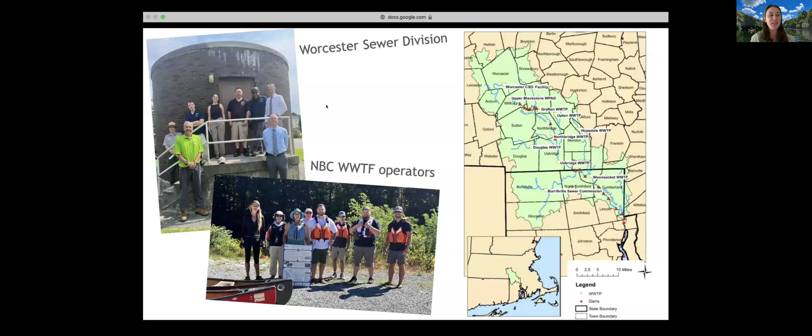I should note that the city of Worcester was invited to participate and speak today, but they declined to participate, but we wanted to make sure that we shared this information about combined sewer overflow. Just making a note that if Worcester is in the audience, we welcome your comments, we welcome your clarifications or added information.

So just a quick overview of our run of order of things today. First, we will have Alicia Taha speaking about combined sewer overflow kind of 101. What is this topic? Giving us a good background. And then Kaylee McLaren, our restoration manager, will talk about the city of Worcester. Catherine Kelly from the Narragansett Bay Commission will speak about Pawtucket and Central Falls. And then Catherine Lang from Mass Rivers will talk about resources. We will leave time at the end for Q&A. So like Leah said, please put your questions into that Q&A box and we'll get to them.

So with that, I will introduce Alicia Taha. She's the documentary author of New England's Unseen Environmental Threat, Combined Sewer Overflows. So I'll stop sharing and go ahead, Alicia. Awesome. Thank you so much, Stephanie. Let me start my share.

All right. So hi, everyone. My name is Alicia Taha, and I am a recent graduate from the University of Massachusetts Amherst. For the last year, I've worked with Professor Spector in the Political Science Department on a faculty-student collaborative research project on combined sewer overflows. Throughout our project, we were able to interview some incredible people in the space. Stephanie Covino and Catherine Lang were just two of those amazing people.

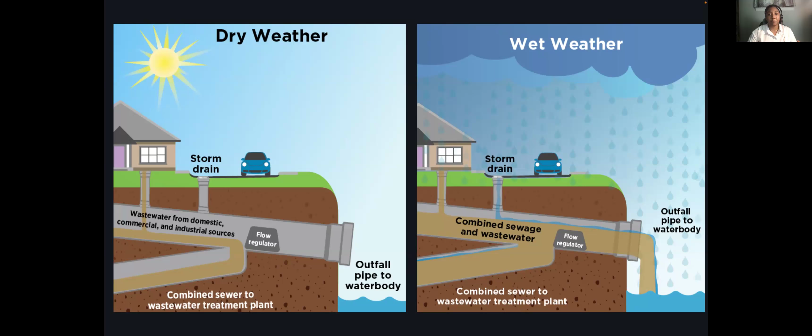When I talk about this, what I usually find a lot of people have a really hard time wrapping their head around is that this mechanism was actually built into the system when it was made, but what they couldn't have foreseen at the time was the precipitation patterns that affect us today.

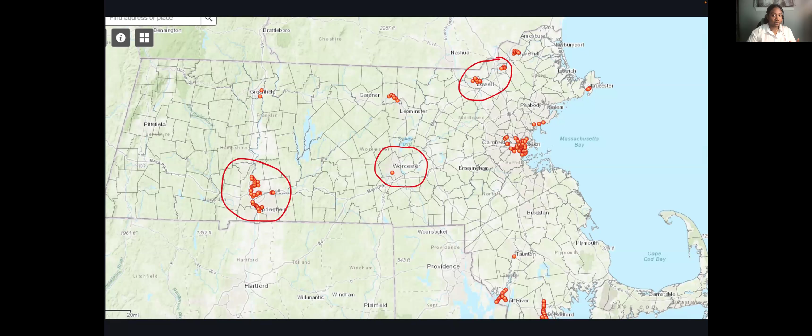So, how will climate change worsen CSOs? Well, when we started our research, it was during the summer of 2023 when we were seeing record-breaking numbers of CSO activity, which of course was directly correlated to the record-breaking number of rain events that summer as well.

So what we can expect to see, and I actually quote from Catherine here: we are seeing more precipitation. It's coming in heavier, flashier events, which completely overwhelm our wastewater facilities. These facilities were not built for the precipitation we are getting today, and they're certainly not built for the trends that we are expecting to see in the future.

And here are some metrics from the summer of 2023. This first bit we learned from John Macone at Merrimack River Watershed Council. So in the 61-day period of June and July, on 28 of those days, CSOs occurred in the Merrimack River. And on 39 of those days, the Merrimack was under a 48-hour no primary contact advisory. And this was happening during arguably our most prominent time for recreation in the area.

That summer, I was also able to attend a CSO facility tour, thanks to Stephanie. And what we learned there was, on average, at that facility, there would be 12 CSO discharges in a whole entire year. But in July alone, there had already been 7 CSO discharges. So what we can see here is that if we're predicting that one of climate change's major effects will be the increased frequency and scale of precipitation events, we will also see those numbers increase for CSOs as well.

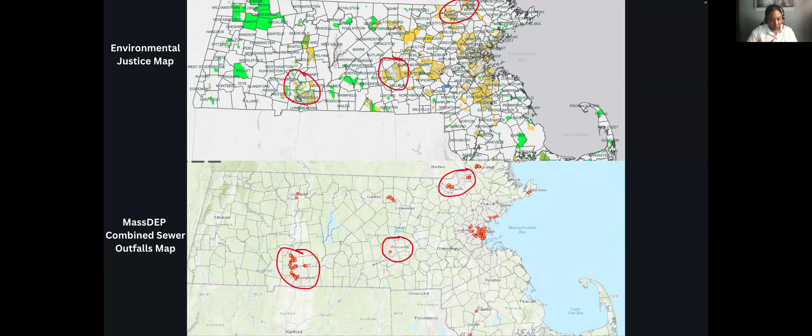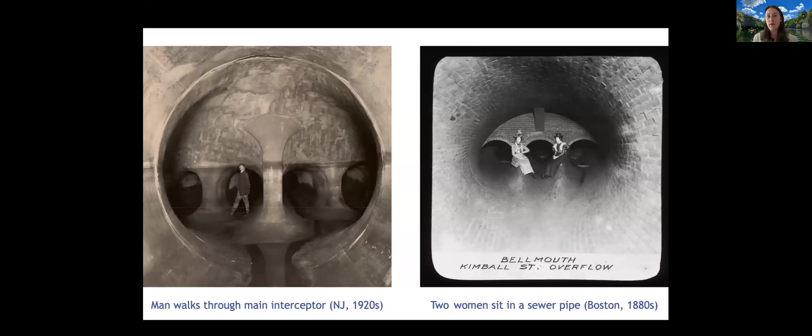There are different ways to address CSO, and I won't go into this in detail, but just to kind of break it out into 3 different categories. One is separation of your pipes. One is adding decentralized green infrastructure or sometimes gray infrastructure in a lot of different places to kind of take that stormwater out of the system to allow more room for that one pipe for that stormwater and sewer to go. And then the last is creating a very large, more centralized holding area to take a lot of that stormwater out, wait until the storm passes, and then be able to send it into the wastewater treatment facilities.

So in Boston, for instance, they estimated that it's about $340,000 per acre to treat this, to separate their system. In 2021 alone, they spent $30 million, and they have plans to separate East Boston and South Boston, about 20,000 acres or so, and that's only 3% of their sewer system between 2024 and 2029, and this is costing millions.

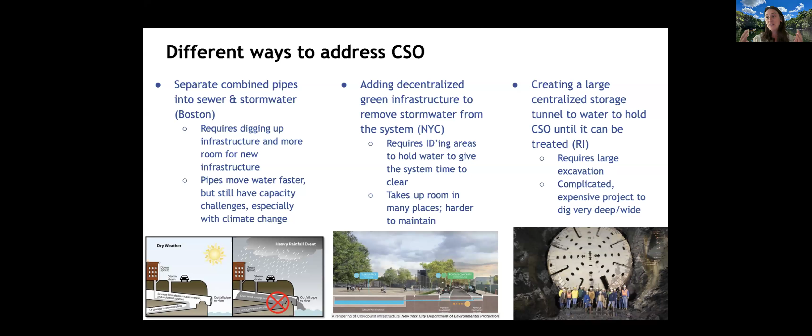And then in New York City, they have spent also millions of dollars on all of these different decentralized projects, including things like tree box filters, porous concrete, adding storage underneath things like basketball courts and sidewalks. So there's a lot of different ways to solve this particular problem. And next, I'll let Kaylee talk about what's going on in Worcester. So Kaylee McLaren is the restoration manager at the Blackstone Watershed Collaborative. Kaylee.

Great, thanks so much, Steph. Yeah, so I'm Kaylee. I'm going to be talking about CSO specifically in Worcester. So the facility that treats the City of Worcester's wastewater is called Upper Blackstone Clean Water, and it's one of New England's largest wastewater treatment plants or clean water facilities. It's also referred to that way because their product is clean water, which I love.

So it serves roughly 250,000 people in the greater Worcester area, and it discharges directly to the Blackstone River in Millbury, Massachusetts. So the water that leaves the facility is actually much cleaner than the river itself. So in this picture, we can kind of see that, right? Where the treated water on the left meets the Blackstone River on the right, and the treated water is a lot clearer than the river itself.

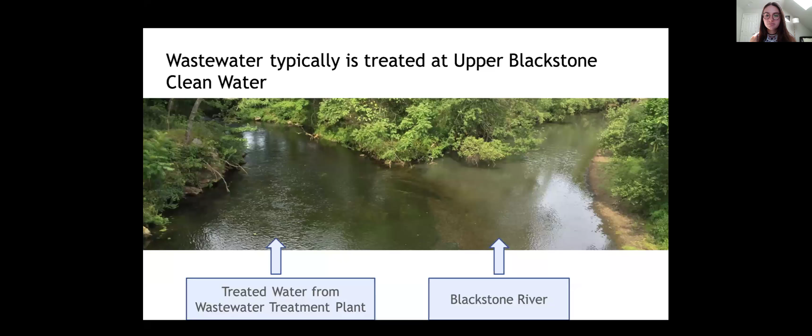The city of Worcester constructed a unique CSO treatment facility in 1984, and this facility usually acts as a regular pump station to Upper Blackstone Clean Water. So as a reminder, the waste flows via gravity to the lowest points in the city, and then it's pumped upward to get to the next leg of its journey via gravity. And then eventually it reaches a wastewater treatment facility.

However, during extreme rain events, when we have the infrastructure that can't handle the water volume coming in, the CSO treatment facility can hold water until there's more capacity, or it can partially treat the water and release it into the Blackstone River. And then in very extreme rain events, the CSO treatment facility might have to bypass and discharge untreated CSO water directly to the Blackstone, but that's pretty rare.

And the total length of the CSO pipe is only about 7% the total length of the sewer pipe in the city. And here we also have a map of where the CSO treatment facility is and where the CSO outfall is in relation to the rest of the city.

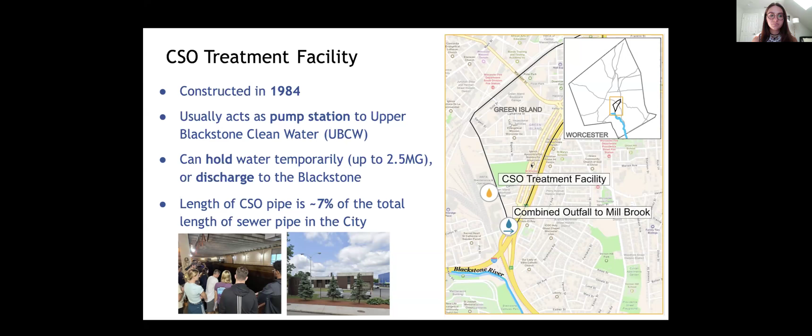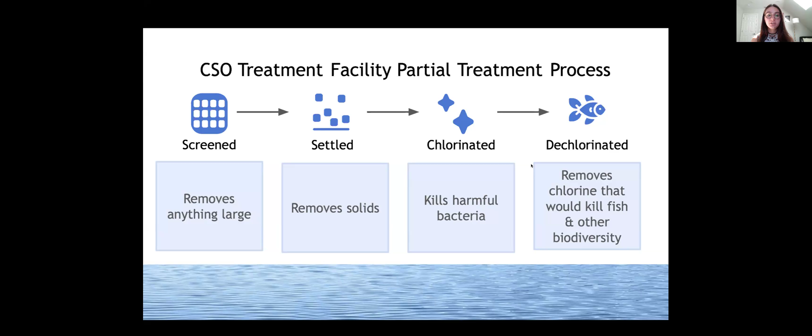The CSO treatment facility has a partial treatment process where the water coming in gets screened, settled, chlorinated, and then dechlorinated. So the goal is for solids to settle and be removed, and then bacteria are removed via chlorination, and then the dechlorination process makes the water safe to enter the river without killing fish or other biodiversity.

So there are 4 scenarios that can happen at the CSO treatment facility. The first is the dry weather scenario. So during dry weather, the CSO treatment facility acts as a regular pump station, and sewage gets pumped to Upper Blackstone Clean Water. So no water is being held or treated at the CSO treatment facility in this scenario.

The second scenario is a minor storm, and the facility operators are confident that the rain will end quickly and have little accumulation. So since we're in New England, that's definitely a tough one to be confident in. But the water coming in gets partially treated through that process of screening, settling, chlorination, and dechlorination, and then the water is held in storage tanks within the CSO facility and then pumped to Upper Blackstone when they have the capacity to receive the water. So this scenario is not very common.

And then the third scenario is a CSO event where the water is partially treated by the CSO treatment facility by that same process of screening, settling, chlorinating, and dechlorinating the water, and then it's discharged to the Blackstone River. So when this happens, the City of Worcester sends out an alert via an email list and their website to let the public know that there was a CSO event and you should avoid contact with the water for 48 hours in the communities of Worcester, Millbury, Grafton, and Sutton.

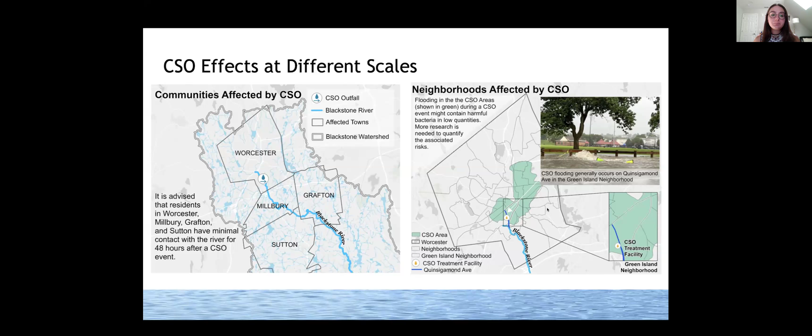And ideally, the pipes in these areas would be replaced with new separated pipes, but this is very expensive to do. So in 2019, Worcester published the Integrated Water Resources Management Plan, outlining how they can meet the city's sewer, stormwater, and drinking water infrastructure needs within the next 50 years. So the goal of addressing these things together is to make sure that the city and the taxpayers can really just get the best bang for their buck on the many different infrastructure projects that are needed.

And since 70% of the city is considered part of an environmental justice population, the goal is to limit ratepayer costs. And the city estimates that state and federal mandates for water resources capital spending over the next 50 years will reach $2.6 billion.

So some of the examples of projects identified in the integrated plan include the Green Island Flooding Relief Conduit for $40 million in 2031. So this is the highest scoring capital improvement project within the integrated plan. However, it is just a conceptual plan at this stage. So the plan notes that the final engineering design will consider green infrastructure opportunities and be implemented where it's feasible and cost effective, but it doesn't give much more information beyond that.

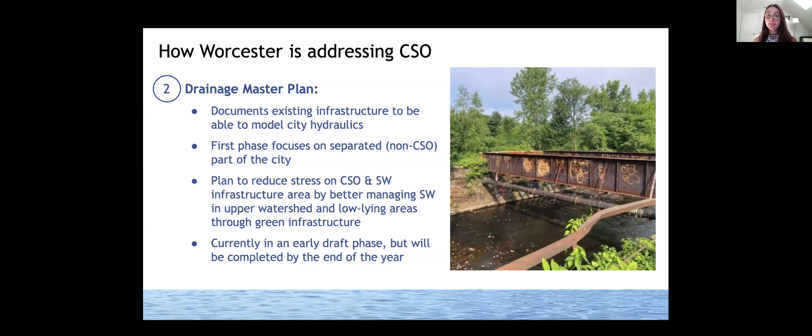So the first phase focuses on the separated part of the city. However, reducing stress on the stormwater system and the higher points of the city might also help reduce CSO by freeing up the system for more CSO in other lower lying areas. The city is also working to update their CSO long-term control plan. So stay tuned to learn more about that. The last plan was from 2004, so it'll be really interesting for us to hear what this plan will include, like which projects have been completed and which ones have been added to the priority list to ensure these continued improvements keep happening.

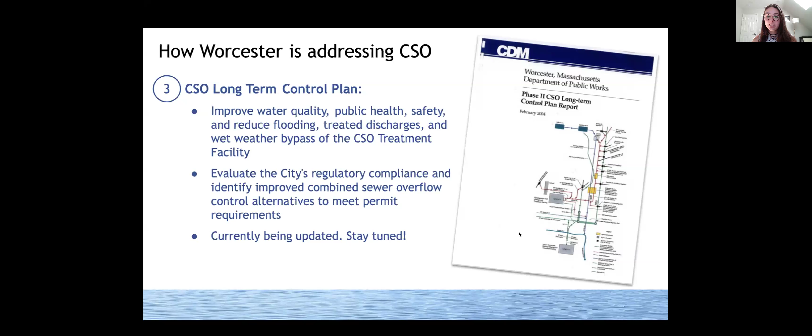And the city recognizes that wet weather impairment should be addressed, and the integrated plan notes that they believe that investments in stormwater controls will yield greater benefits than further investments in combined sewer overflow controls. But we believe that much more investment needs to be made on addressing CSOs, and that there are many steps in identifying the ways to replace pipes and create storage and add green infrastructure to reduce stormwater flows. And we also hope to continue partnering with the city to help improve the public understanding of this issue, which is critical to address it.

So we've been working with the Worcester DPW to hold tours of the CSO treatment facility in both 2022 and 2023 to help educate both our partners and the public. So if you're interested in learning more about CSO, especially if you're a Worcester resident, I would encourage you to reach out to your city councilor, to DPW, or to the Sustainability and Resilience Department, because there's a lot of work that needs to be done, and it can be tough to gain support to prioritize something as generally unexciting as sewer overflows without a push from the public to do so.

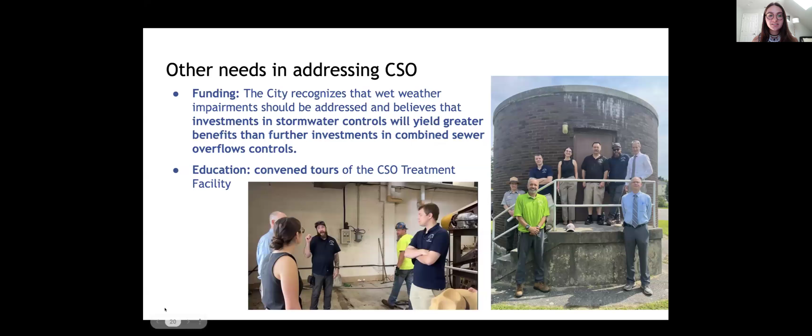Thank you so much. And again, I wanted to say a thank you to the Upper Blackstone Wastewater Treatment Facility; I know the director's also in the audience. So that's a part that we didn't include, but if people have questions for her, I maybe voluntold her that she can help out with some of those questions as well.

I also wanted to mention, and apologies for not doing this before, that I wanted to give one more acknowledgement to both the Hassanamisco Nipmuc Band and the Narragansett Indian Tribe. When the Blackstone Watershed Collaborative was created 3 years ago, addressing CSO was not one of our top priorities. It hadn't come out, but those two Indigenous partners really pushed to say that this is important and we want you to prioritize it. And so I give them full credit for having it be a really important issue that the collaborative is working on.

So thank you. Next, I'll introduce Catherine Kelly. She's the Assistant Director of Engineering and Construction at the Narragansett Bay Commission. So I'll stop sharing and I'll hand it over to you.

Okay, can you see my slides? We cannot. Okay. You see it now? No. There we go. You got it? Perfect. Okay. Thank you. Sorry.

So NBC's CSO program was broken up into 3 phases. Phase 1 of the program included construction of a deep rock CSO storage tunnel underneath the city of Providence. That was about 3 miles long, 26 feet in diameter. We also included diversion structures and drop shafts at 8 CSOs, as well as relief structures and a tunnel pump station to pump the flow to Fields Point.

Phase 2 of the program included construction of 2 near-surface interceptors along the Woonasquatucket and Seekonk rivers. This would pick up CSO flow from outfalls along these rivers and convey the flow to the tunnel. And we're currently in phase 3 of the program. Phase 3 will include construction of a CSO storage tunnel, as well as a tunnel pump station and drop shafts and various near-surface facilities to convey flow to the tunnel itself.

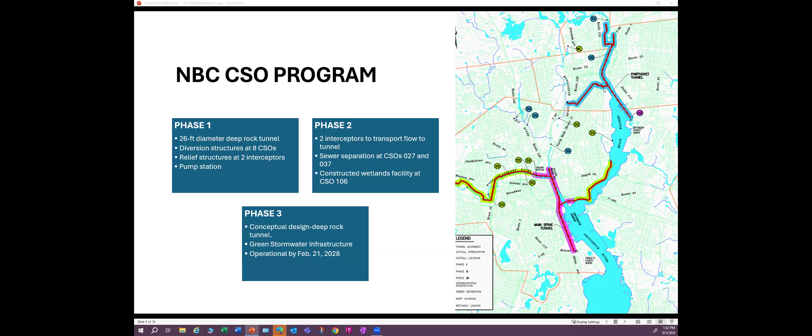And the whole point is to capture this flow that originally discharged to the receiving water, redirect it to a tunnel, store it in the tunnel until the wet weather event is over and there's capacity at the treatment plant, where the flow can receive treatment before being discharged to the plant's receiving water.

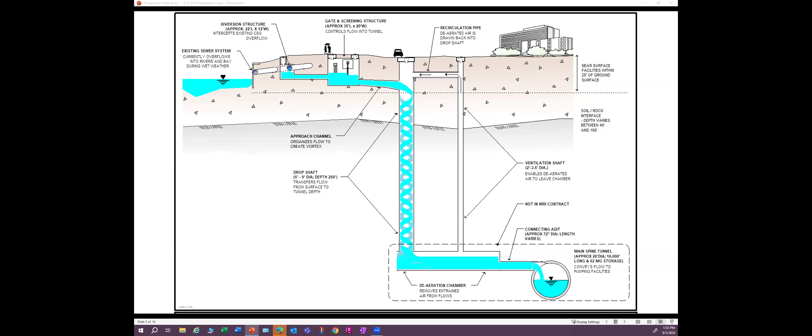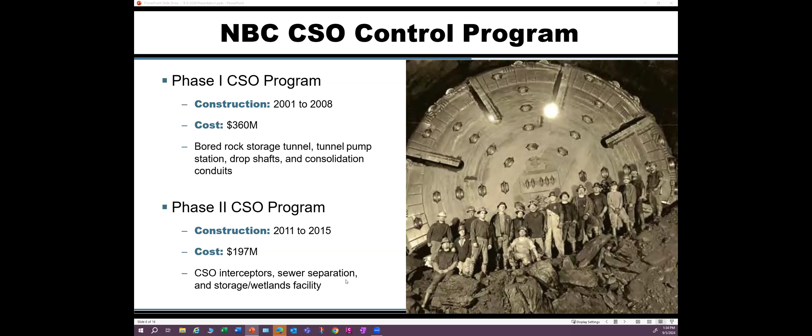So phase 1 of the program occurred during the years of 2001 to 2008, and the tunnel pump station went online in November of 2008. And that was completed at a cost of $360 million. Phase 2 of the program was completed in 2015 at a cost of $197 million. And again, that included those near-surface interceptors that picked up flow from CSO outfalls and conveyed it to the Providence Tunnel. We also did several sewer separation projects during phase 2 of the program.

So we're currently in phase 3 of the program, and phase 3 has been broken up into 4 subphases, 3A through 3D, and this will occur over a 20-year period. The construction of phase 3A facilities is expected to end in 2027, so we're right in the middle of this effort. And construction cost for phase 3A is estimated to be $900 million. The total cost for all of phase 3 is $1.4 billion. So we're addressing most of the flow during phase 3A.

And I think two of our largest CSOs are being addressed right now. As part of phase 3A, we will be constructing a CSO storage tunnel. This tunnel will be about 2.2 miles long, 30 feet in diameter. We're constructing a tunnel pump station, as well as various drop shafts and consolidation conduits and other near surface facilities that will convey CSO flow to this Pawtucket tunnel.

One thing we're doing in phase 3 that we didn't do in earlier phases of the program is the installation of green stormwater infrastructure, or GSI. NBC has committed to spending $40 million on GSI during the 4 subphases, so $10 million during each subphase.

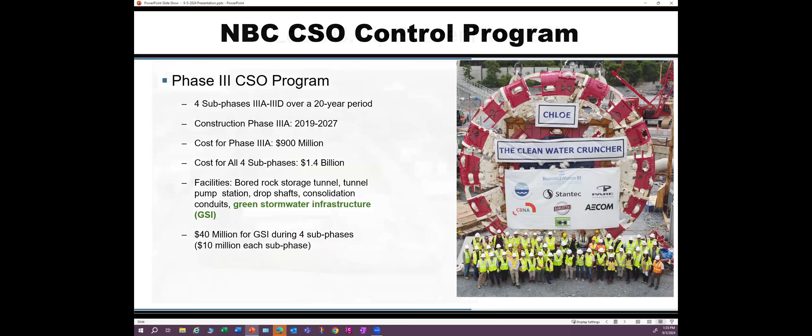So now I'm going to talk about some of our GSI projects that we've done. These are projects that folks at NBC are really proud of, and it's really been a benefit to the community in which we've done this work. So early on in the program, NBC partnered with the city of Central Falls to remediate existing athletic facilities or properties that were found to be contaminated, and rehabilitate these fields and also install green stormwater infrastructure.

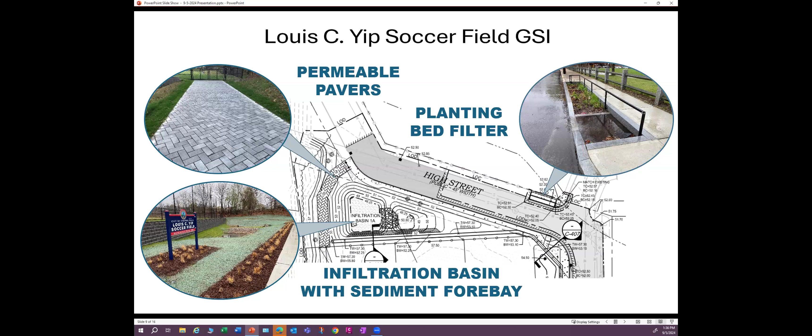The first project I'll talk about is the Louis C. Yip soccer field. About maybe 7 or 8 years ago, this was a property that had been abandoned. It was an abandoned industrial property, not in use. The city acquired the property via eminent domain and worked with NBC to do a design for green stormwater infrastructure on the property. GSI on the property included 2 infiltration basins on the north and south ends of the property. We also installed permeable pavers and planting bed filters along the roadway adjacent to the soccer field.

This is another great project that NBC participated in, the Macomber Stadium GSI project. Again, another field that was not in use due to contamination found in the soil. Furthermore, the field had essentially reached the end of its useful life. I don't think it was used by any youth athletic groups. It may have been used by some adult athletic groups, but it wasn't a good field.

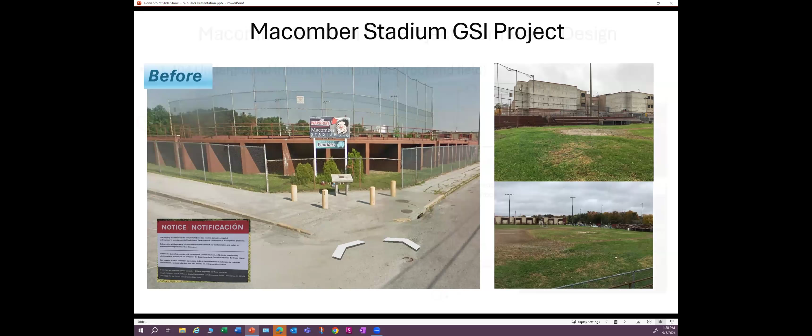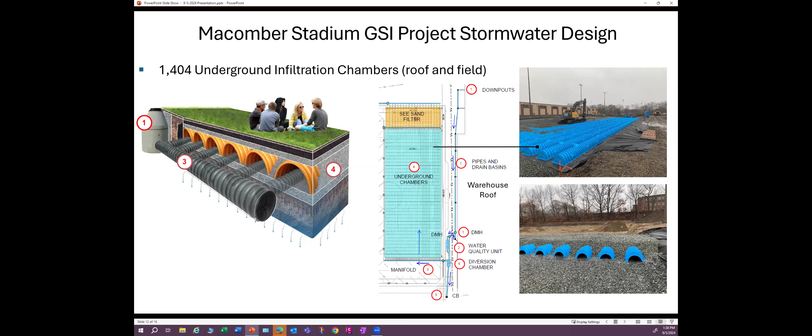It needed some work. So NBC installed infiltration chambers underground, along with a sand filter, and these infiltration chambers were sized to hold, I think it was around 140,000 cubic feet of stormwater runoff, which is about the volume of stormwater runoff generated during a 25-year storm. We connected roof leaders from an industrial facility located north of the property to these underground chambers, and we also redirected stormwater runoff from the roadway to these chambers. Following completion of installation of the chambers, we constructed the artificial turf field over the chambers.

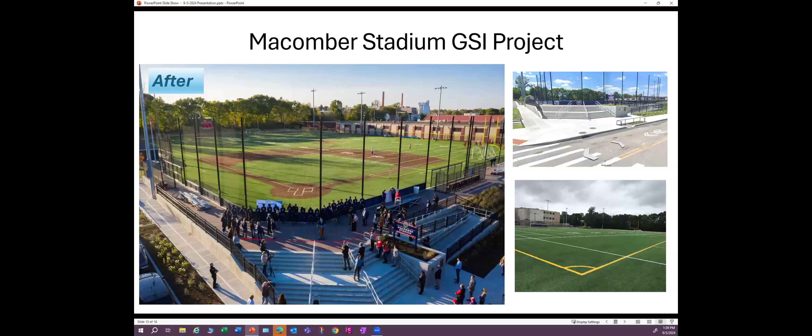And then the third GSI project that I'm going to talk about is the Pierce Park GSI project. This included construction of a basketball court with pervious pavement. Underneath this basketball court, there was an infiltration system similar to what was installed at Macomber Field, the underground infiltration chambers. Same concept here. We redirected stormwater runoff from the road to these chambers, so it infiltrated to the groundwater table instead of being directed to the combined system where it could contribute to CSO overflows to the Blackstone River.

So we had to tear up the field to create this overflow pipe. When we restored the field, we put in an environmental cap over the contamination and rehabilitated the field, and that's now in use as a baseball field.

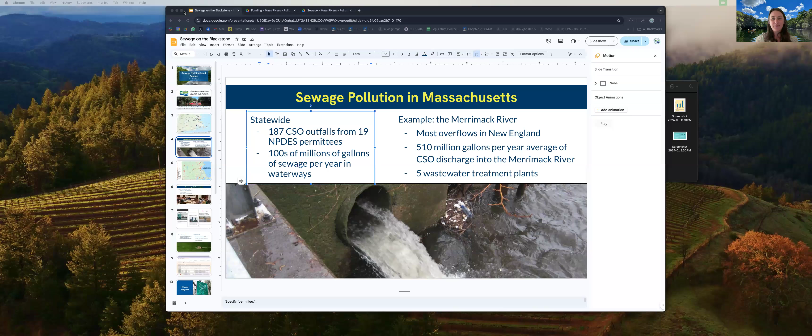All right, we are almost live. Oh, you're getting a preview of my slides to come.

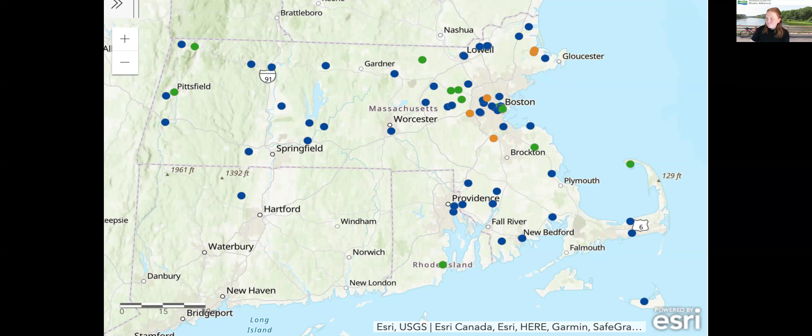Sewage pollution is a really big deal for us because it is in fact a statewide issue. We have 187 outfalls across the state. Alicia showed that map earlier of all of the little dots. It is an intensely widespread problem. 19 different communities experience sewage pollution from combined sewer overflows, resulting in hundreds of millions, sometimes billions of gallons of sewage pollution per year in our waterways. And as mentioned, with climate change, that's only increasing.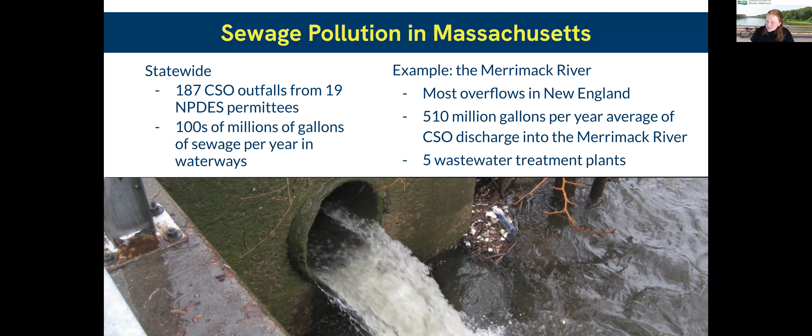The Blackstone certainly is one place that gets it, the Merrimack, the Chicopee, the Connecticut. As you can see, I put the numbers of outfalls per city on the left. It's serious across our state. It's something that all of our cities are grappling with.

Mass Rivers was involved in the effort to create the sewage notification program that Kaylee mentioned earlier. That's something that we are really proud of being involved in and are excited to see on the ground now. In all of those cities with combined sewer overflows, you can sign up, just like Kaylee mentioned, for that email, that text alert to let you know when and where there's been an overflow so that you can stay safe and avoid the water for 48 hours in that area.

That's the most public facing part of this law, but there's also some other components that we're excited about as well. There's now signage at public access points to waters that might be contaminated by sewage pollution, letting you know that that is a thing, because as we know, a lot of folks don't think about their sewers, don't know what a combined sewer is, or that it might be harmful to their recreation. So there is signage in various languages to reflect the languages spoken by the populations that live there.

There's also an online database now where whenever there's an overflow, that data of how much, where, and when is now recorded online. So if you are a sewage nerd like me, you want to crunch the numbers, you can do that online. That's something we've never had before. Before the law, we were able to say, there is sewage pollution in these areas. We could estimate. Sometimes the utility, like the DPW, would have an estimate of how much was coming out and where and when.

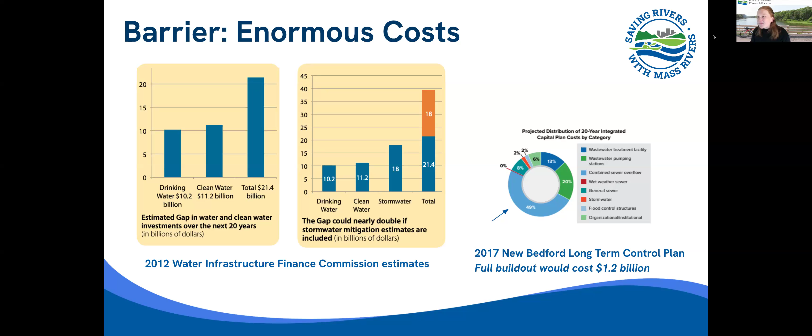CSOs are a big engineering project, as we just saw with that enormous tunnel in Rhode Island. They're serious projects that cost a lot of money, but that's no excuse to fail to pursue them. It is a high cost. We know that. It is only going to become more expensive as they deteriorate further with these heavier storms and heavier use.

So anyone in the audience today, I would implore you to bring up sewage pollution whenever you're talking with your municipal, your state, your federal leaders, because all levels of government are involved in the administration and the funding of these solutions. In some cities, we're seeing a lot of progress happening, and you can just ask: what are those projects? What is happening? Where can I see progress in our city? In other cities, that progress is less apparent, and you can ask, what's the status?

What's going on? Most of these are going to have a long-term control plan or an integrated plan, but either way, taking a look at that. What's the timeline? What are the goals? And is your city meeting those goals? Is your city prioritizing sewer and water quality?

Sewers are easy to forget about because they're underground and it's out of sight, out of mind, but certainly we know that they are a crucial part of any residential area, any business operation. We need them to function well. So just checking out, is my city investing? Is my city taking this seriously?

At the state level, there are grant programs, there is funding available to help with water infrastructure broadly, including green infrastructure. So if you're speaking to your state legislators, asking them, please invest more. The need couldn't be greater. The need is immense. We need to invest more in all of these solutions. The same is true at the federal level.